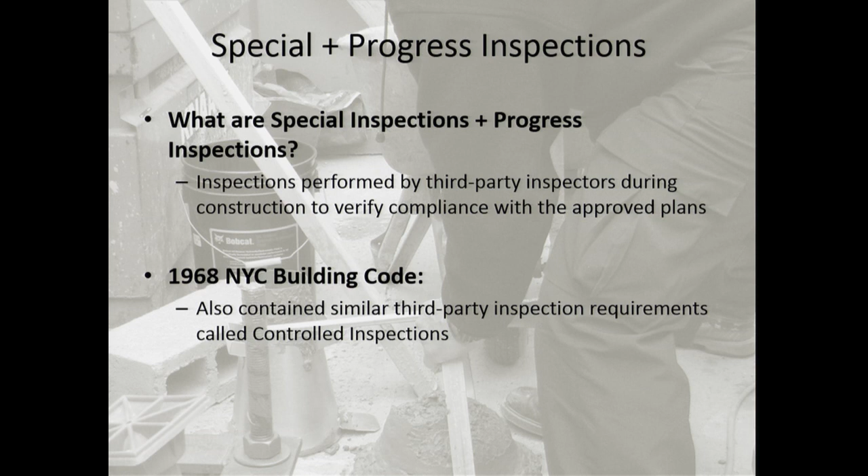Okay, so just some basic background, because I know there's still many people out there who still refer to controlled inspections. I heard mention of a 10A form last week. So for those of you who still remember the 10A form, basically special inspections and progress inspections are inspections by a third-party entity that's not the department, it's not the contractor, it's some other entity. It's typically a PE or an RA or someone under their supervision, confirming compliance with the approved construction documents. Under the '68 code, they were known as controlled inspections, and when we got onto the IBC model, we started calling them special inspections and progress inspections like everyone else.

So who can perform special inspections? DOB registered special inspection agencies. Registration has been open and mandated now for over a year, and I think it's going quite well. There's going to be much more enhancements and outreach on it going forward with the 2014 code, as well as more outreach from OTCR on special inspections going forward.

And progress inspections operate similarly to special inspections. I'll touch on them a little bit at the end. It's the same concept of checking for compliance with the approved plans, but there's no required registration with the department for that. And who can perform progress inspections are a PE or an RA with relevant experience or someone under their direct supervision. Okay?

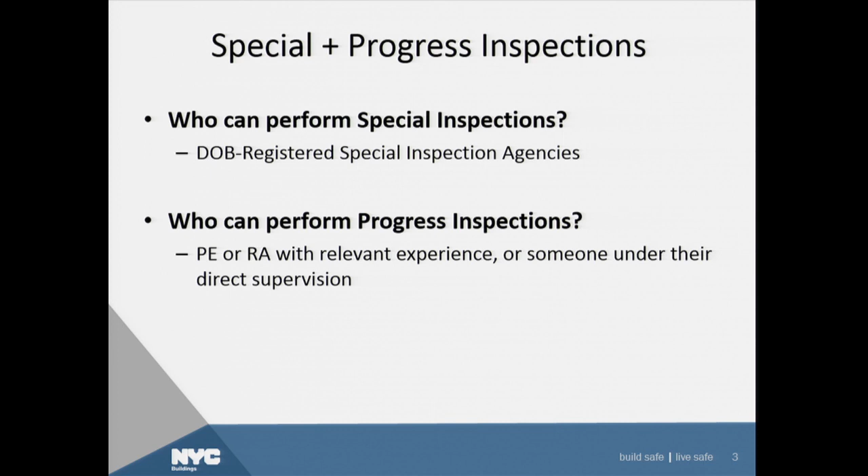Now, again, similar to the 2008 code requirements, special inspections will again apply to new buildings and alterations to existing buildings. The requirements can be found largely in the same chapters and locations you found them in the 2008 code. We're talking Chapter 17 of the Building Code, Title 28 of the Administrative Code, 28-114, 115, and 116 have requirements there. They've all been tweaked, a couple of commas added here, some words. The word 'immediately' has been moved around a few times, as you'll see here, but the requirements are largely the same from the 2008 code.

Okay. Now, everybody's favorite rule, DOB rule, Department Rule on Special Inspections, 1 RCNY 101-06, the Rule on Special Inspection Agencies, which covers registration as a requirement, how to register, as well as the organizational requirements and the qualifications for the supplemental inspectors performing the inspections. That rule has been in effect since July 1, 2008. It's been amended once, and it is going to be amended again to line up with the 2014 code.

I'm going to highlight some of the changes to Chapter 17 for you. You'll see some renumbering, some renaming, some new requirements, some tweaks here and there, and because of that, some of these changes were such that we have to amend the Rule on Special Inspections. It's due in the City Record, to be published in the City Record and on our website any day now, with a public hearing to be held over the summer for those of you who are interested to review and to comment. And the plan would be to open registration for any new particular 2014 code items over the summer. Stay tuned for more information on that.

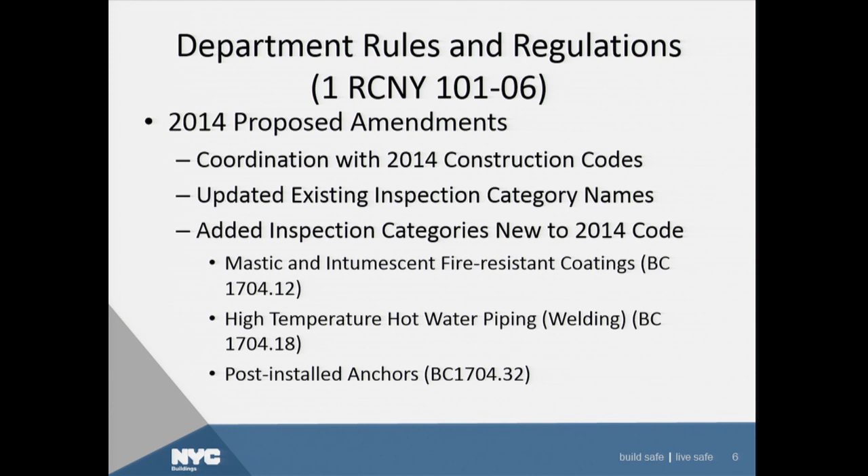So the other new inspections are mastic and intumescent fire-resistant coatings, which is from the IBC - it's a special inspection that the IBC requires - and post-installed anchors. The installation of post-installed anchors has been subject to special inspection for quite some time now. It's finally being addressed in the code. Previously, the special inspection was required in the ICC Evaluation Service report or in the Department of Buildings Bulletin, or both.

Now, there's going to be some operational impacts, so we have to rename the existing registration categories for the special inspection agency registrations. We're going to open up registration for the new items.

The plan would be to do some kind of conversion for everyone, for all of the 08 code categories that you're registered for to perform these inspections, to convert your existing 08 code registration to the equivalent 2014 code registration. That way it would hopefully be seamless for the special inspection agencies already registered - it would just be updated for you.

But again, we have those new items that we would have to open up registration for, hopefully over the summer. We have an accreditation deadline that needs to be addressed in the department rule, where now we have new inspection items that if you're a Class 1 entity looking to do this, you're going to need some time to get accredited.

I would start that as soon as possible, as soon as we get you more information on the particular registration qualifications and requirements for those inspection items. I would start talking to the accrediting bodies about getting yourselves accredited to those if you want to do that as a Class 1 entity.

We, of course, have to update everybody's favorite form, the TR1 form, and all the other TR forms that go along with it, to have the right 2014 code references.

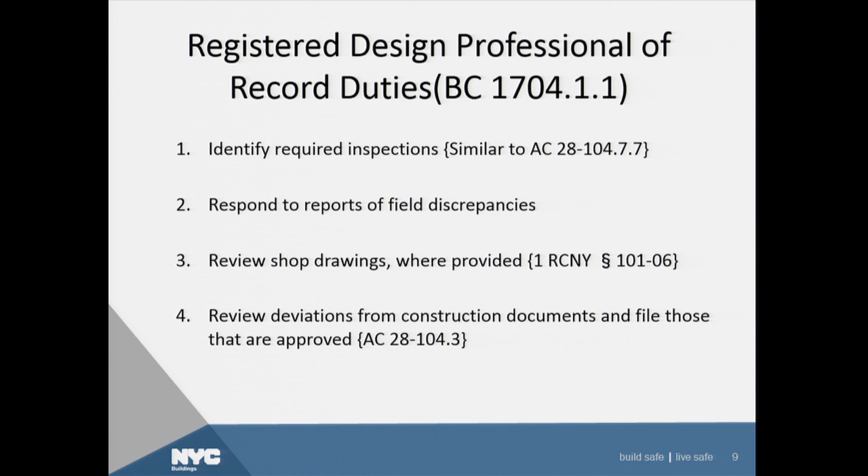Special inspection agency duties - again, independence from contractors performing the work. This is nothing new here. It's the obligation to avoid a conflict of interest from 1 RCNY 101-06, and they have to be hired by the owner, which was previously in the 2008 code, BC 1704.1.

This is a common question that we received, so we wanted to be sure we highlighted it for everyone. We've had building bulletins published on this as well. Expect lots of information to keep coming out about this, but those are two very important requirements: the obligation to avoid the conflict of interest and to be hired by the owner.

The applicant of record, of course, this comes up also very frequently, can perform special inspections on projects where they filed the plans and they're the applicant of record for. They can do it, provided they're registered and meet all the qualifications for the required inspection, and they comply with the independence and conflict of interest requirements. There's no specific prohibition just by being the applicant of record on a project that you are prohibited from doing the special inspections or progress inspections on that same project.

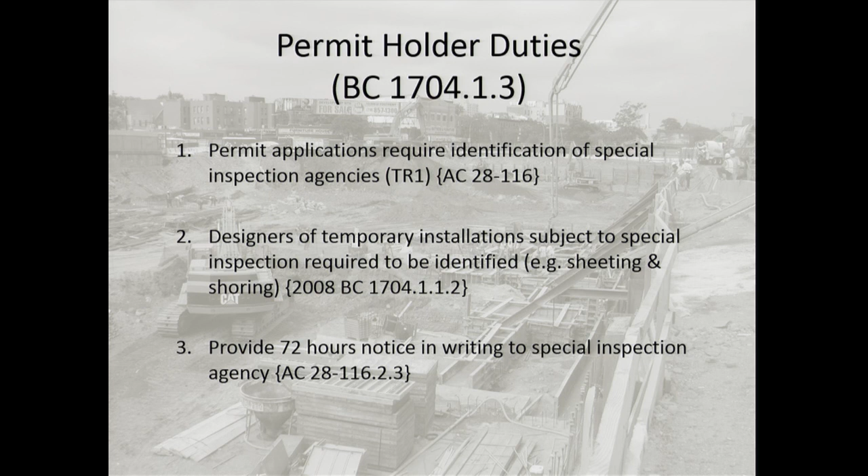Inspection of fabricators: similar to what was in the 1968 code, special inspection must be performed in the fabricator's plant of work. If the work was subject to special inspection at the construction site and that same work is performed at an off-site location, it's still subject to that same special inspection. The exception here is for approved fabricators.

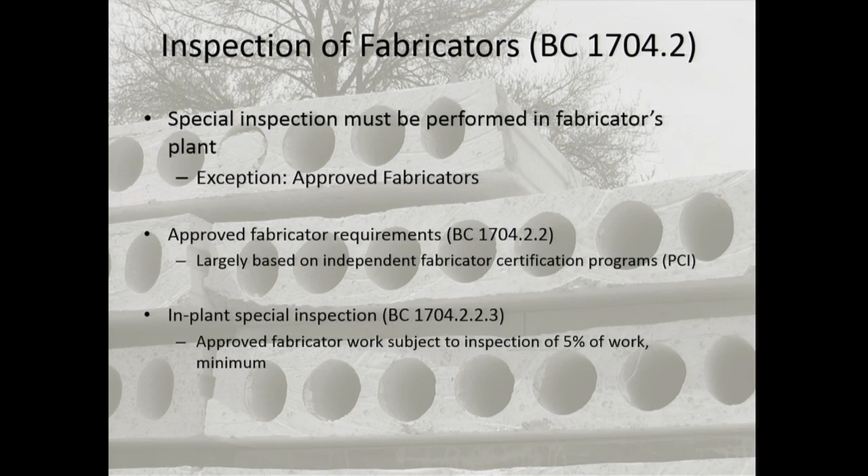Many people have asked over even the last week, 'Really, I didn't know there was a list of approved fabricators, can I see one?' So yes, we have a list of approved fabricators on our website, nyc.gov/buildings. Under Development, you'll see a section called Approved Agencies Overview, and further down the page a segment called Approved Fabricators, where you can see a list of approved fabricators, approved concrete producers, and the rule that accepts all of these things.

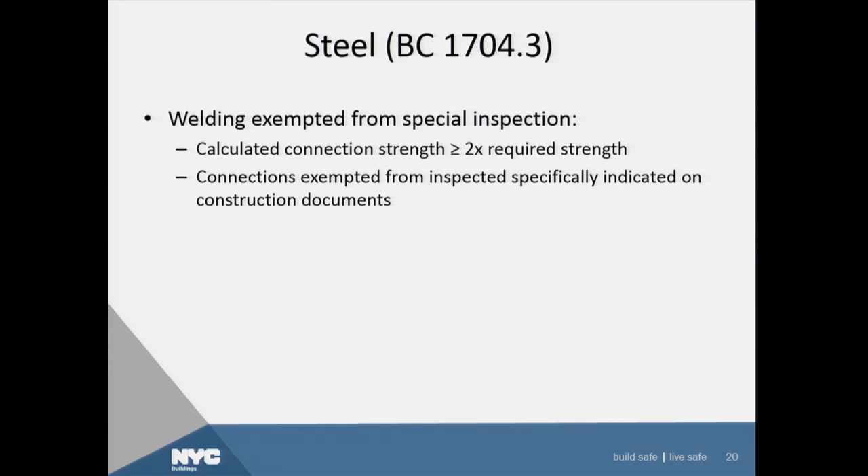High-strength bolting, similarly, can also be exempted from special inspection if, in this case, we've got an extra caveat: inspection of those connections is made under BC 1704.3.2 details, checking that the steel is put in the proper location, right lengths, and proper framework. If the bolts are checked during that inspection, then a check as a high-strength bolt may not be required if you have bearing type connections, and again the connection strength is 2 times what's required, but these connections have to be specifically called out as such on the plans by the applicant of record who prepared those plans.

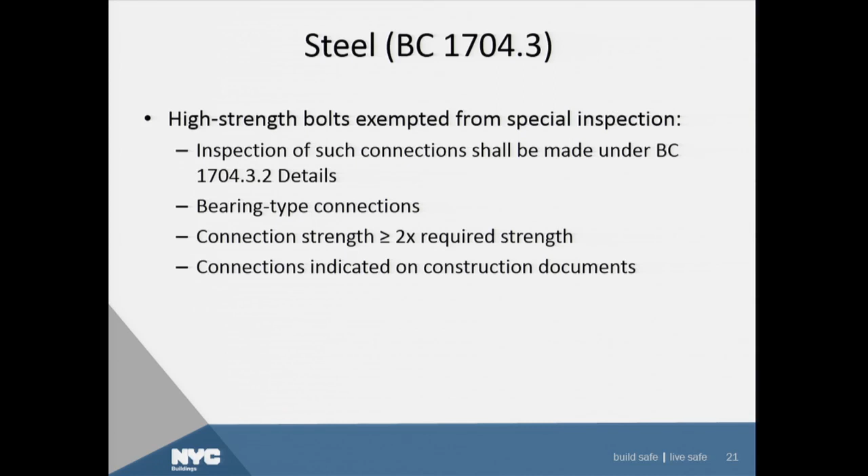Reinforced concrete: we've incorporated some exemptions for concrete testing. This would be an exemption from concrete testing only; the special inspection would still have to take place, but the concrete testing can be waived for structural work with less than 50 cubic yards of concrete, which was in buildings bulletin number 26 of 09, as well as now an added exemption for 1 and 2 family homes, 3 stories or less in height. There are some minimum strength requirements, and both of these would require the applicant of record to specifically exempt the testing on the plans. Our code provides a minimum quality assurance program required by the building code. Anybody can require a greater level of inspection, testing, or quality assurance that they want. Our code provides the minimum required for an acceptable plan.

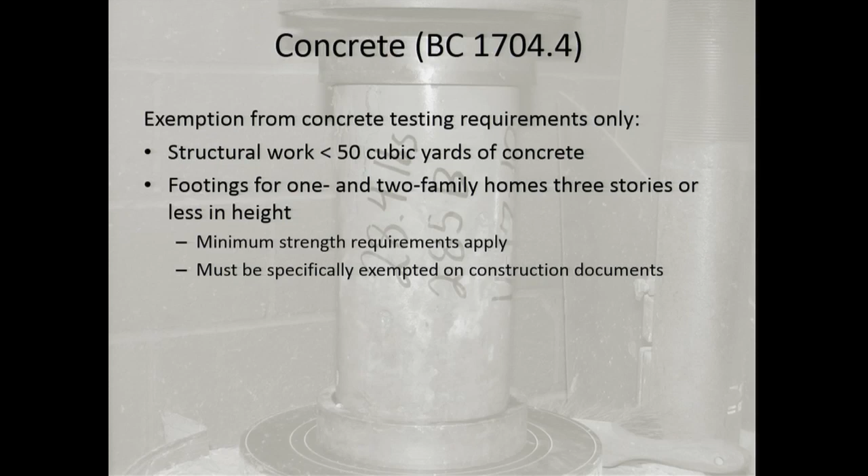Masonry, 1704.5: the requirements for when level 1 and level 2 special inspection for masonry are required has been clarified. This is a big improvement made with the committee to clear up a lot of exceptions that were written in by the IBC to the text here. An exemption was also proposed by our committee, and we accepted it, to exempt specific alterations to existing masonry buildings from special inspection that are less than 10 square feet in any 100 square feet of wall area, and again must be specifically exempted on the plans by the applicant of record preparing those plans.

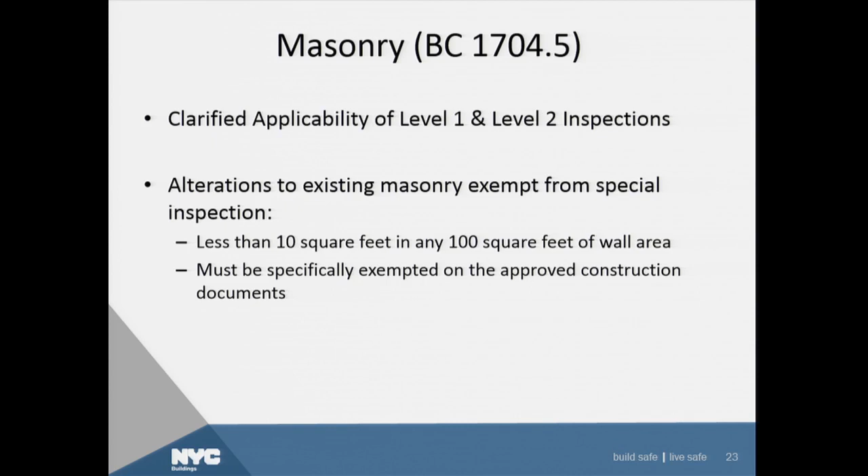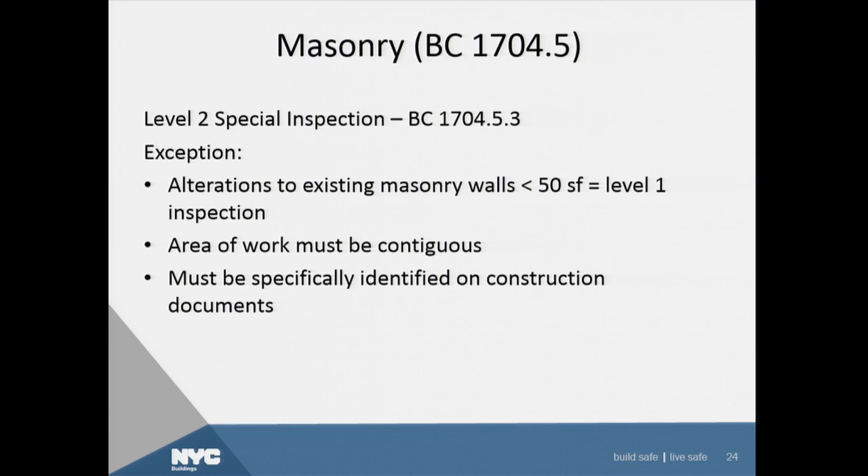Further, for level 2 masonry special inspection, which has in some instances a continuous inspection requirement for the special inspector, there are exemptions where you can reduce that by designation by the applicant of record from a level 2 inspection to a level 1 inspection. This is for alterations that are less than 50 square feet to existing masonry walls, and the area of work has to be contiguous.

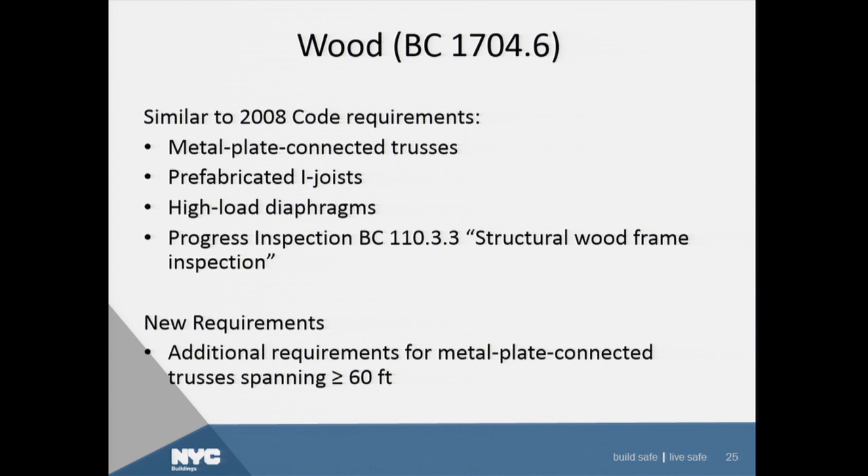Wood construction special inspections are very similar to what was in the 08 code. One clarification here goes along with the progress inspections in chapter 1 of the building code: the progress inspection BC 110.3.3 structural wood frame special inspection used to be called structural frame inspection. That's now been clarified, so structural frame special inspection is now only required for the structural wood frame as a progress inspection. There's also been additional requirements when using metal plate connected trusses spanning greater than or equal to 60 feet, a requirement we got through the IBC 09.

Subsurface conditions: these are all the special inspection requirements for geotech soil conditions, as we used to previously call them. So you'll see some name changes - site preparation, as it was named under the 08 code, is now subgrade inspection. Soil investigations, because it's more than soil, it's rock too, is now subsurface investigations.

Some highlights of what changed: previously 50% of the borings had to be witnessed by a PE. Now the committee proposed and we accepted that 100% of the borings have to be witnessed by an SIA, the Special Inspection Agency registered with the department. Since we have this registration requirement, we can relax the requirement that the PE witness 100% or 50% of the borings.

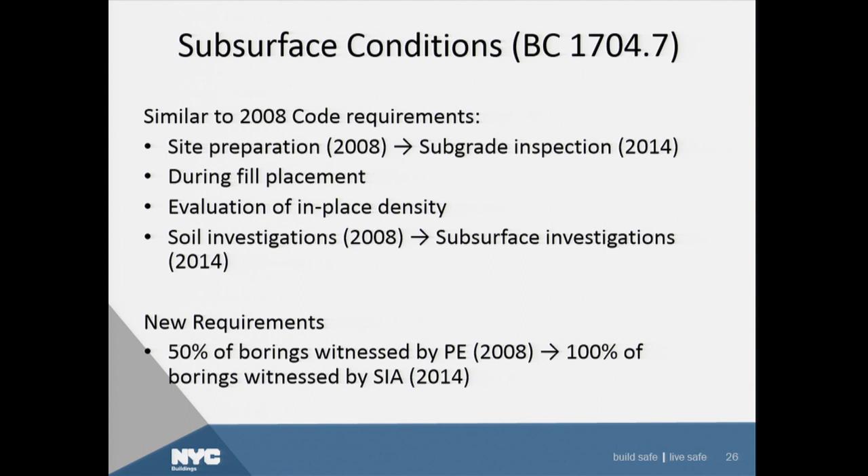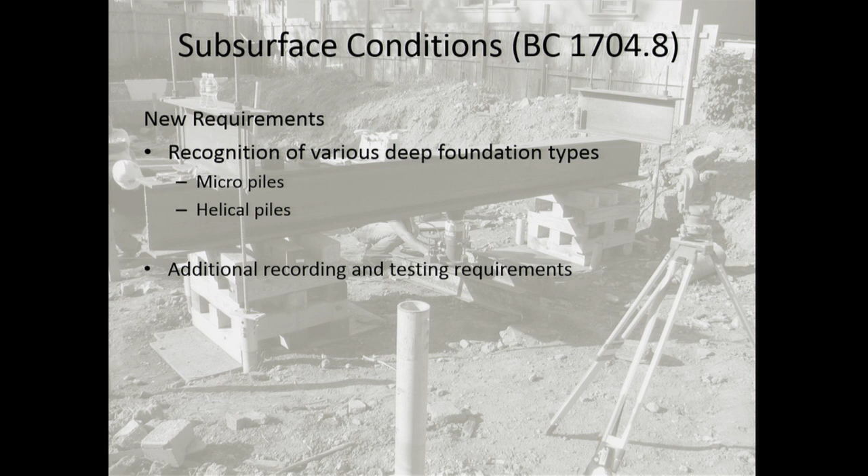Now, as far as some subsurface condition inspection requirements, with the recognition of what you heard from Joe regarding micropiles and helical piles, we have additional recording and testing requirements specific to those types of installations in Chapter 17.

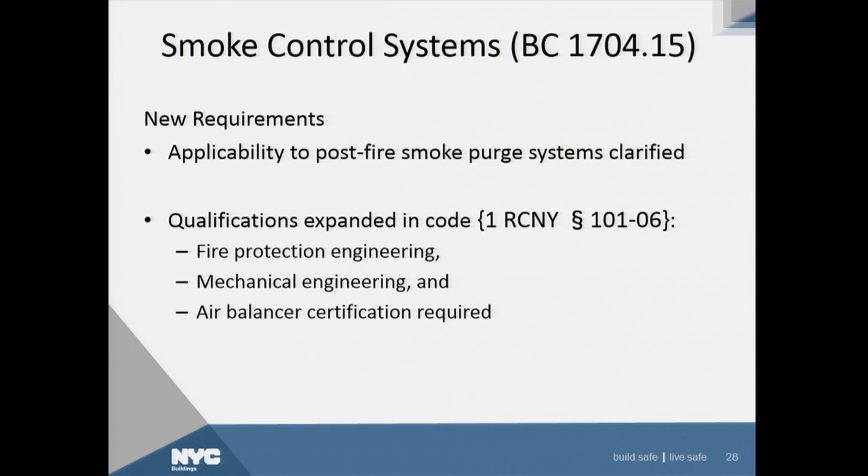Mechanical system special inspections have been coordinated with the revised noise control requirements of 928, and the inspection requirements clarified, we think, to make it a little bit simpler for how to comply.

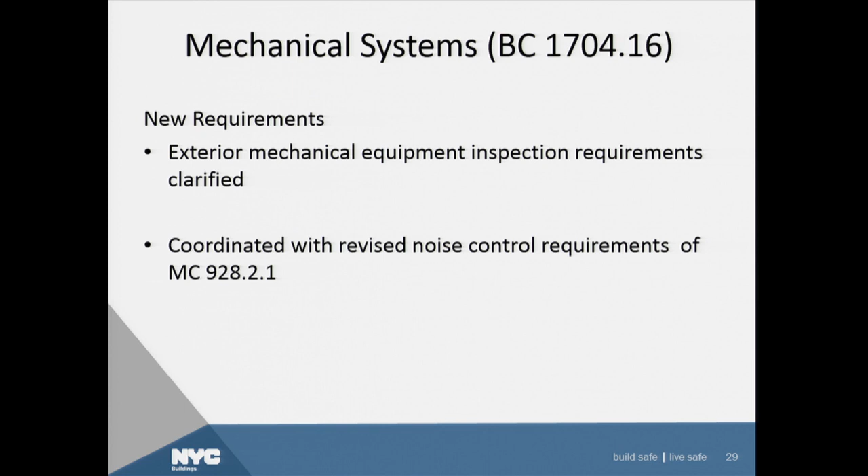Structural stability has been reorganized in a very good way, I think, to make it a little bit more reflective of how the inspection is being used and carried out in the field. It's got a reorganized inspection requirements section that calls out each of the individual structural stability components that we require special inspection for, and gives you program requirements afterwards.

One thing we did was, previously it was called structural safety during construction operations. We named it back to something more similar to what it was under Rule 16 under the '68 code, to structural stability of existing buildings in the 2014 code.

Many people used to misconstrue that structural safety during construction operations included confirming whether or not the contractor's employees were wearing proper personal protective equipment and things of that nature, and worried that they were now responsible for things like that. But this is specific to the structural stability requirements.

And we've added back exceptions for lintel replacement spanning 4 feet or less so that they can be exempt from the structural stability inspection.

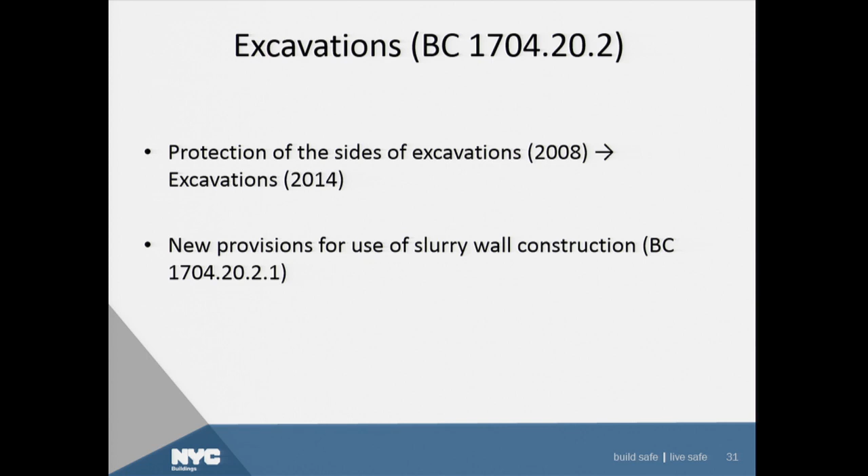One of those items listed under structural stability is excavations. So protection of the sides of excavations from the 2008 code is now called excavations under the 2014 code, but with a slightly shorter title. And we've now incorporated, along with some enhancements in Chapter 33, new provisions for the use of slurry wall construction to protect the sides of excavations and keep trenches open. So we have requirements addressing that directly in Chapter 17 now.

Underpinning: as Joe mentioned, there's a clarification that the underpinning elements that are installed have to be subject to all the other required special inspections as if they were permanent foundation elements, because they are permanent foundation elements in most instances where they're going to be left in place—that's your adjoining property's new foundation. So they would be subject to all the appropriate inspections, including concrete, welding, pile driving, whatever other inspection items come up.

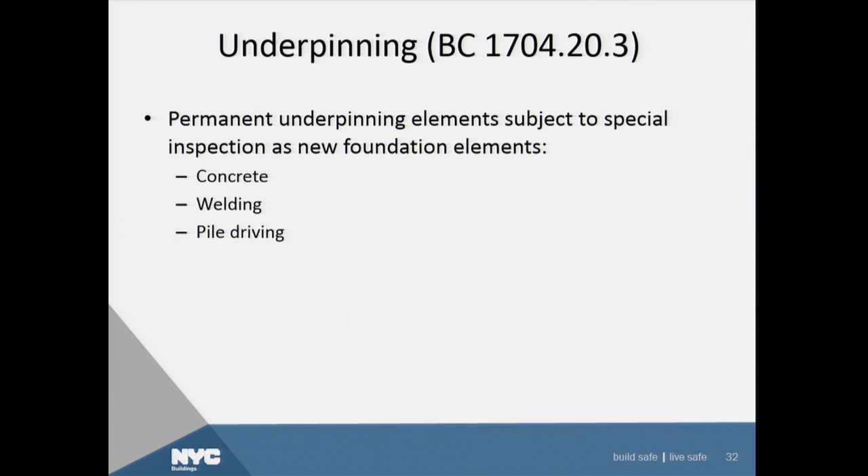Demolition: we have mechanical demolition. Again, non-handheld mechanical means of demolition used from within a building are still subject to special inspection. The addition here was that use of non-handheld mechanical means of moving debris from within the building was added to being subject to inspection. So if demolition is carried out by hand, a giant debris pile is created by these workers by hand, and then a bobcat is used to push the debris around from within an existing building, that would be subject to special inspection.

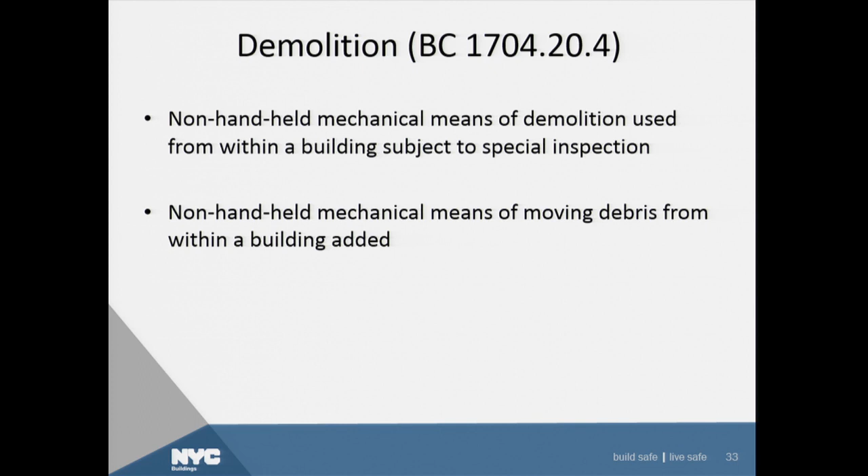Raising and moving of a building was added by Local Law 29 of 2013, and the special inspection of this activity—this would be raising a building to get it above the flood elevation—was pretty important post-Hurricane Sandy activity that needs some additional on-site supervision to be sure we don't have any further distress on people who are already in a flood zone, and now they're asking a contractor to do something that can be quite complicated in some cases: to lift an existing building in place and then build a new foundation underneath. So the inspection was added by the City Council in 2013 to ensure we have additional on-site supervision, and we've moved it into the appropriate location under structural stability.

And we've incorporated some of the requirements of Buildings Bulletin 2013 number 9 for how to carry out some of these operations.

Monitoring was addressed in the building code under structural stability, including in construction documents—requirements and triggers for monitoring, including operational specific parameters such as frequency and tolerances. So you say, well, we'll monitor the building, but who are you going to report to? What are the appropriate actions to be taken at what thresholds during monitoring? This is now specifically addressed in the code.

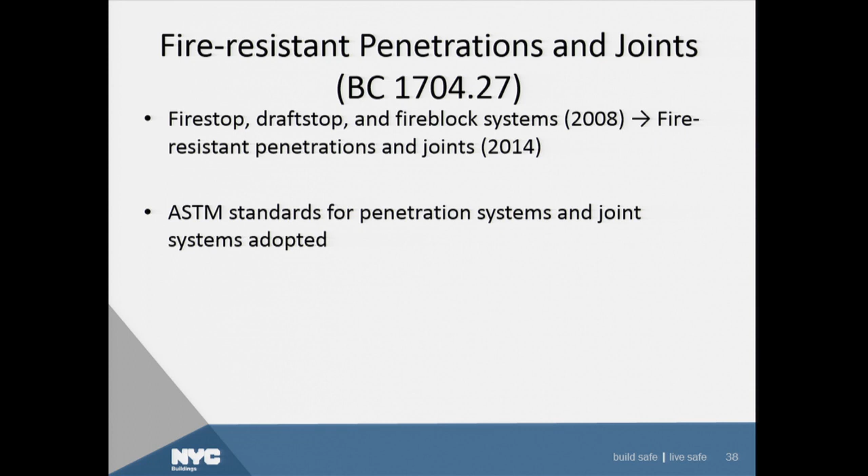Then, of course, we've heard lots of mention of emergency and now the new term standby power systems. Standby power systems, which were added by Local Law 101 of 2013, also now include - they're also subject to special inspection, just like emergency systems.

And post-installed anchors, as I'm sure many of you know, are installed after the concrete has been hardened or the masonry has been installed - you're installing something in after the fact. It's typically mechanical anchors, adhesive anchors, or screw anchors. They'll be subject to special inspection. Like I said, they have been subject to special inspection in the past, but now they're recognized in the code itself.

Now, these inspections are required to verify compliance with the approved plans. There will still be a buildings bulletin, and still evaluation service reports for these items that will need to be verified. They have specific installation and inspection requirements in these evaluation service reports that certify that when they're installed to these parameters, you're going to get this load capacity out of it, and to manufacturer's instructions. Now, ACI 318 requires continuous inspection for certain adhesive anchor installations, so sometimes the inspector will be required to be out there continuously.

Now, a little on progress inspections - this is again very high level. These are inspections required during the course of construction to confirm compliance with the approved construction documents. There are roughly the same number of progress inspections that we had before: footing and foundation progress inspection, lowest floor elevation for buildings in a special flood hazard area. What was previously known as structural frame inspection is now going to be called the structural wood frame inspection, to clarify that this applies only to wood frame structures, not other types of structural frame systems. Also fire resistance rated construction, which has incorporated some of the requirements of Buildings Bulletin 2010 number 20 for applicability and the overlap with fire stop systems.

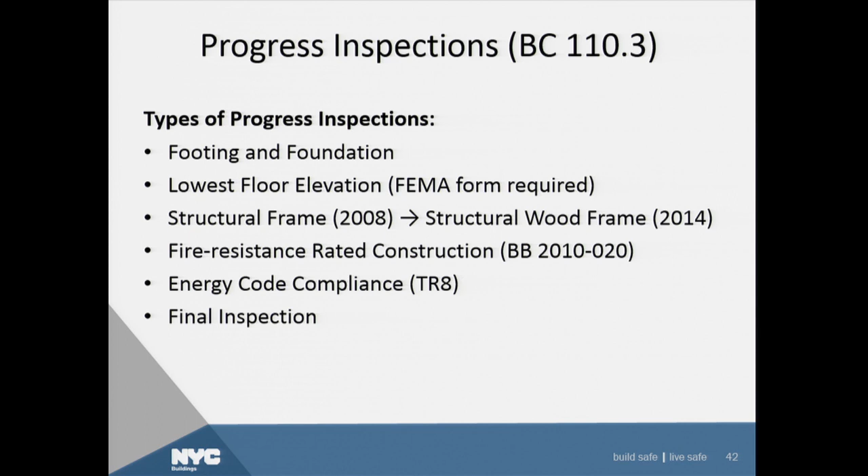So, again, progress inspector's duties - we have a rule on what the progress inspector is supposed to do, 1 RCNY 101-07, and they're required to use qualified personnel to perform the required tests and inspections to confirm all of these individual items. And they're inspecting for compliance with the approved plans. Again, no registration required with us in advance for performing progress inspections.

They have similar requirements for reporting deficiencies. They have to be independent from the contractor, same as a special inspection agency. Again, no prohibition from the applicant of record performing progress inspections on their own projects in and of itself, if they meet the independence from the contractor and qualification requirements, and they have to be retained by the owner. And with that, I thank you.